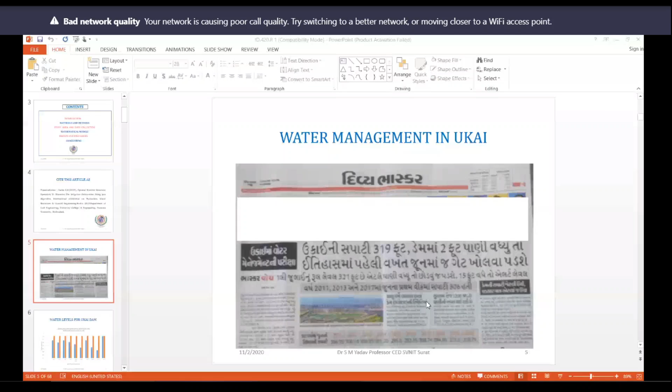Vipin sir, have you muted all of them? Can they unmute themselves? Praniti Mishra, are you there? Praniti. Yes, sir, they can unmute themselves.

Yes, sir. So tell me, my question here is that the water stored in the dam is less, okay, while there is consistent irrigation demand, okay. So because of this, such a year comes in case when there is less storage of water in the dam, right? Can the irrigation demand be satisfied or not?

Sir, repeat again, sir, question. Sorry, I'm not getting it properly. I will repeat, Pranti, I repeated twice. Again I repeat, if there is less water in the dam, right, and irrigation demand is consistent, that is not going to change, okay sir. So if there is less water in a dam and the demand is there, what will happen? Can you be able to satisfy irrigation demand 100%?

I think no, sir. Right. So that's why the title of this particular topic is optimizing irrigation deficiencies, right? So first of all, you understand what I am trying to explain to you.

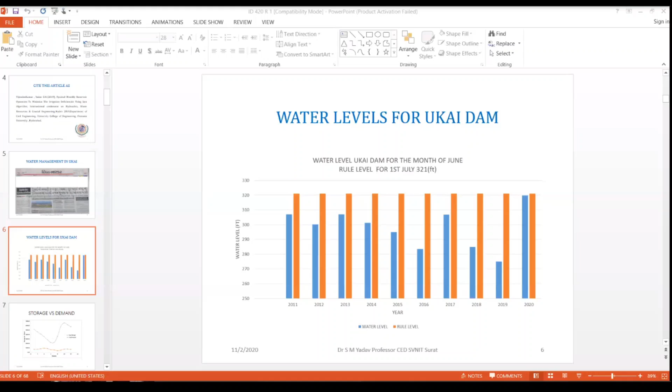If the available water is less, what will happen? There won't be water to supply for the irrigation purpose, right? So why do we need to optimize? Why do we need to do optimization? This is the reason because of which we wanted to do optimization.

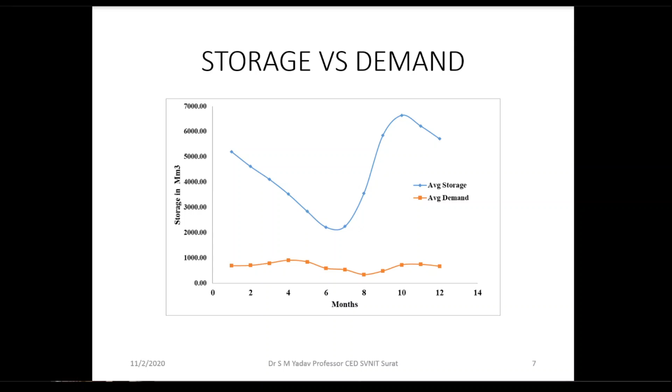But here I wrote average demand. I have not written average irrigation requirement, right? That demand includes everything. So if my demand increases, or demand is more than that of the average storage, what will happen? There will be deficiency in the irrigation water requirement, right? So in this study, in this research, we tried to minimize the irrigation deficiency for Ukai Reservoir.

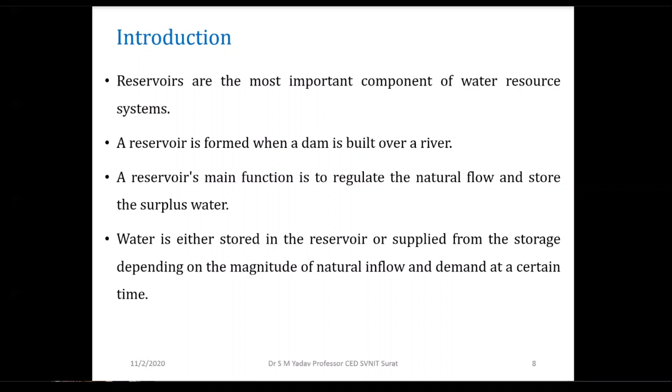So you know what are reservoirs? Reservoirs are the most important component of water resources system. A reservoir is formed when a dam is built across a river. The main function of reservoir is to regulate natural flow and store surplus water. Water is either stored in the reservoir or supplied from storage depending on the magnitude of natural inflow and demand at a certain time, right?

A reservoir offers a water head that can be used to generate hydropower also. Once reservoir systems such as dams, hydroelectric plants and networks of irrigation canals are created, the advantages that can be achieved are largely dependent on how these reservoirs are managed. The effective use of water resources needs not only prudent design but also good post-construction management.

When we say post-construction management, how is this significant or important? I think those who are from South Gujarat or from Surat very well know the significance of post-construction management of a dam. If anyone is from South Gujarat or Surat, please unmute yourself and tell me what happened. I'm talking from a water resources or hydrology point of view, in 2006 in Surat.

What happened in 2006 because of Ukai Reservoir? Anyone from Surat or South Gujarat? The exact date is 8/8/2006, 8 August 2006. Any participant from South Gujarat or Surat, please reply. No one? Okay, if no one is there, fine.

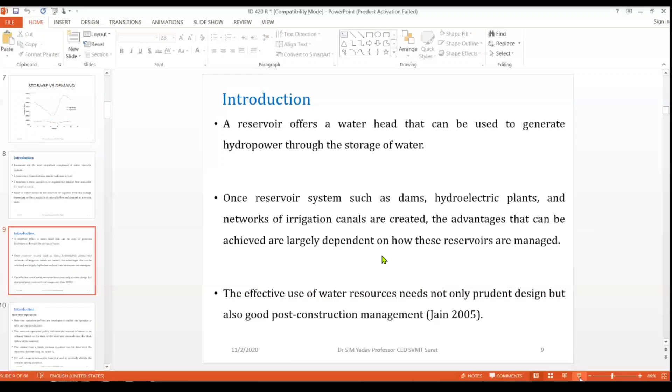Post-construction management is very much required, as in 2006 there was high inflow in Ukai Reservoir and more than 10 lakh cusecs of water was released by the dam authority, and 90% of Surat was underwater. So this is the example of what I mean by post-construction management.

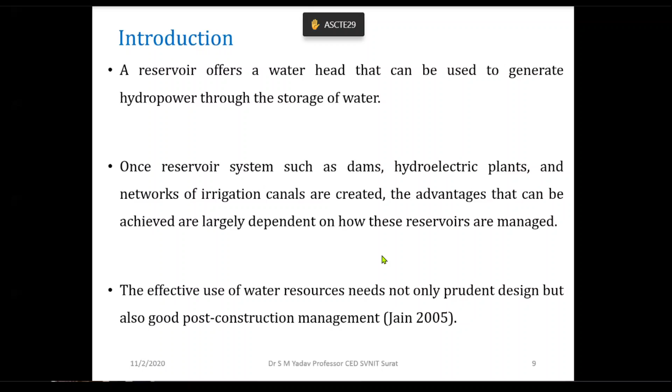When we talk of reservoir operation, the reservoir operation policies are developed to enable the operator to take appropriate decisions. The reservoir operation policy indicates the amount of water to be released based on the state of the reservoir, demands, and the likely inflow into the reservoir. Why is there a rule level?

The rule level is to manage the inflow in succeeding months. Suppose in the month of July I fill the dam full, and there is rainfall in August, September and October. Where will that inflow water go if I have not decided the rule level?

345 is the FRL of Ukai Reservoir, and in July we fill it up to only 321. So the dam remains empty between 345 and 321 for the months of August, September and October. That is nothing but the reservoir operation policy.

Why is it made? It's made depending upon the state of the reservoir, likely demands, and likely inflow into the reservoir. In July we keep it at 321, not filling up to 345. The reason is that if you fill it up to 345, the reservoir will be full.

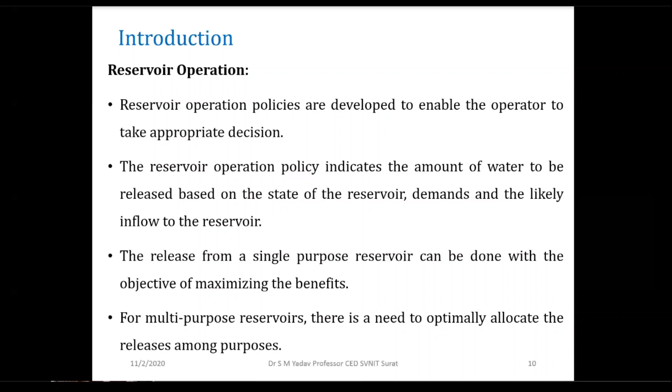Our purpose is to minimize irrigation deficiencies depending upon the varying storage over the last 10-year period for Ukai Reservoir. So this is the multipurpose dam.

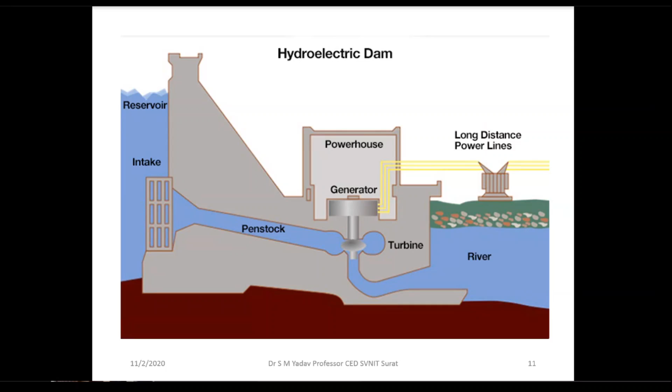How is it operated? How is the power generated? It is shown here. This is very popular. The operation of a reservoir constitutes a very significant aspect of water resources planning and management. The operator must provide comprehensive instructions once a reservoir is created, enabling suitable management choices to be taken.

In the reservoir's operating strategy, the quantity of water should be calculated according to the condition of the reservoir, level of requirements, and data on potential reservoir inflows. So reservoir operation is a very, very tricky operation.

Operating a reservoir is very tricky, and due to climate change, it is becoming more crucial worldwide. Why? Because short duration, intense rainfall in the catchment area of the river results in rushing flows into the reservoir.

And if your reservoir does not have cushion to store this excess water, what will happen? You have to open the gates, and the moment you release water more than the carrying capacity of the river, it will result in flooding of downstream areas. This is happening all over the world wherever there is a reservoir upstream.

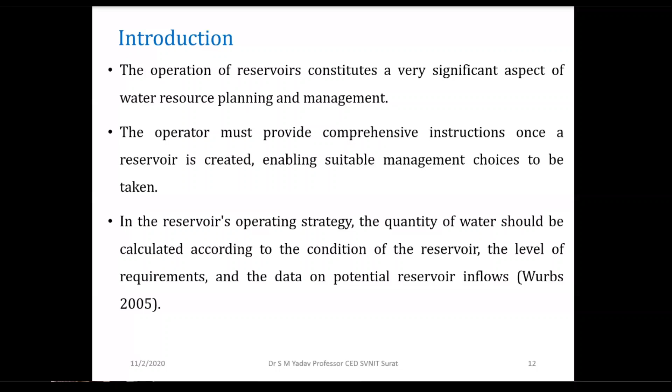Due to short duration, high intensity rainfall, flooding is occurring in downstream areas of the reservoir. So there are a variety of disputes occurring between demands for various reasons when operating a reservoir for more than one purpose, such as space, time and discharge conflicts. In accordance with a set of rules or guidelines for water storage and release, a reservoir is run according to its purpose, and decisions on releases are made in compliance with the demands in various periods.

So we cannot operate reservoirs arbitrarily. Sometimes, if you get a chance to talk to any dam authority or engineer managing water in a reservoir, ask him about situations that create unbearable pressure on them.

For example, in 2006, on 7th, 8th and 9th August, high dramas were going on in the collector's office, where the collectors and the dam authority — the executive engineer or superintending engineers responsible for operation of the dam — wanted to release water because there were high inflows. But the collector may be refusing, saying don't release this much water because we have no time to shift people from low-lying areas to higher areas.

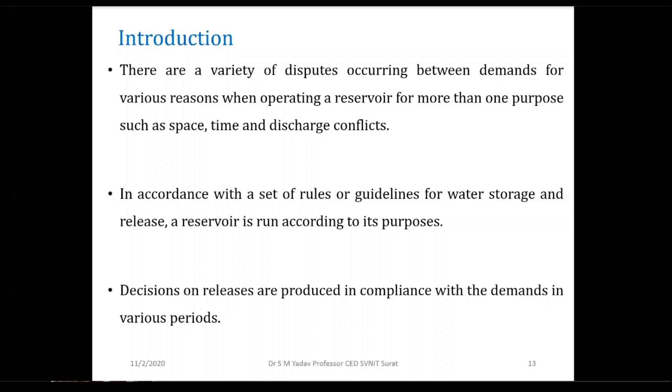We know that India has 3 seasons, and mostly we have to depend on the storage of dams during our monsoon season. Our authority which forecasts the water is the Indian Meteorological Department, and since the last 10 years their performance has improved tremendously.

I'll not go through the optimization topic in detail, I'll just take the definition and various methods of optimization. I will not discuss further as I have been given 45 minutes to 1 hour, so I'll directly come to the problem which we have solved using the Jaya algorithm.

However, just have a look at the definition of optimization. Optimization is defined as the process of finding the condition that gives the maximum or minimum value of a function, where the function represents the effort required or the desired benefits.

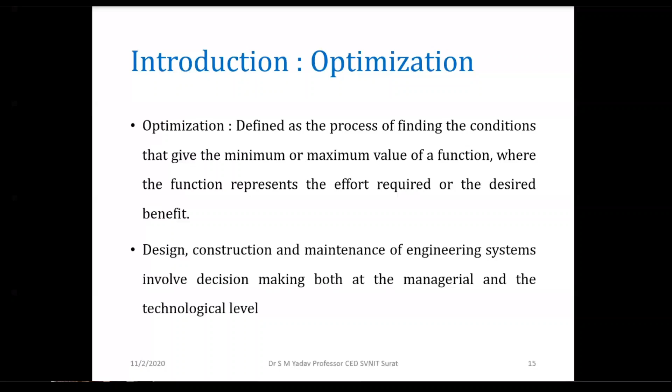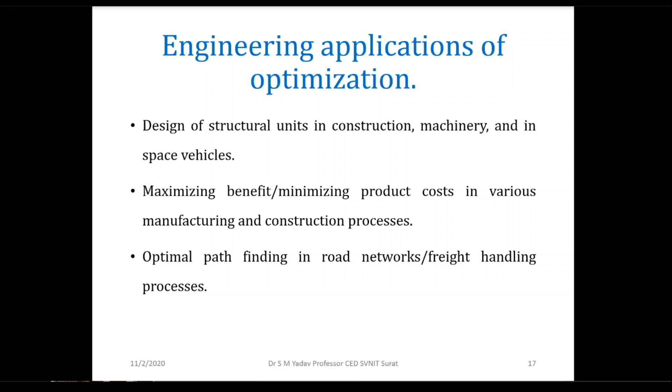So, engineering applications of optimization - I know you are from various areas of expertise in civil engineering. Any specialization you name, there is an application of optimization techniques. So this part I am not explaining in detail.

Briefly I will explain the model building process. In case of model building for optimization purposes, the development of an optimization model can be divided into 5 major phases: Number 1, collection of data. Number 2, problem definition and formulation. Number 3, model development. Number 4, model validation and evaluation of performance. And number 5, model application and interpretation of results.

So whenever you want to develop any model, you have to start with collection of data. Based on the data you have collected, you define the problem, and based on that you develop your model. Then the model developed using this data is required to be calibrated and validated. Once it is calibrated and validated, it is ready for application.

Usually, as most of you are from faculty or teaching, some idea clicks in your mind that you want to do a certain kind of work, and you assign it to your student, or you yourself start doing research work on a specific topic. Then what happens is, the moment you start searching for the data, you find that some data required for your study is unavailable. By that time you have already spent 2 or 3 semesters, or your student's semester is already half over, with half remaining in which he has to complete his work.

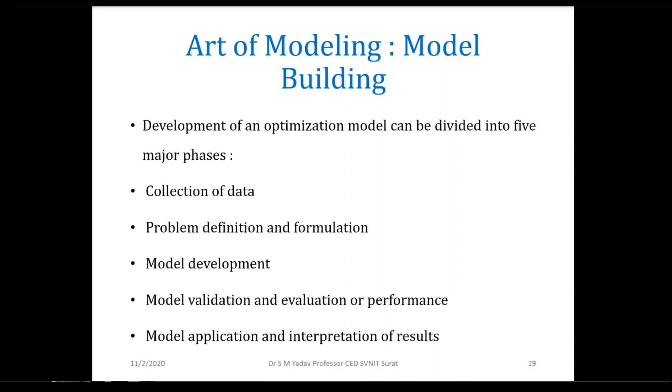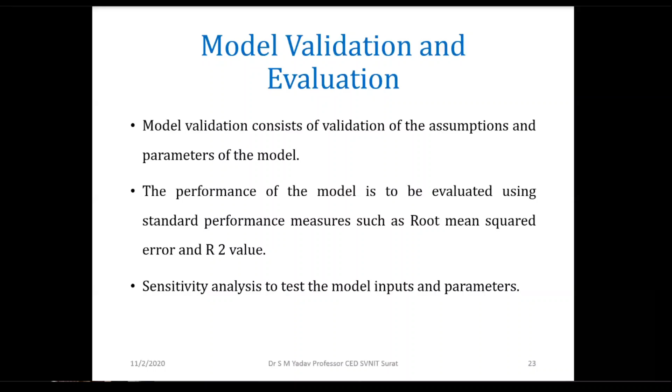However, for optimization model development, these are the 5 steps: collection of data, problem definition, model development, model validation and calibration, and model application and interpretation of results. So this is all about the steps I have described: data collection, problem definition, model development, model validation and evaluation, and then modeling techniques - various modeling techniques you are going to study during this STTP.

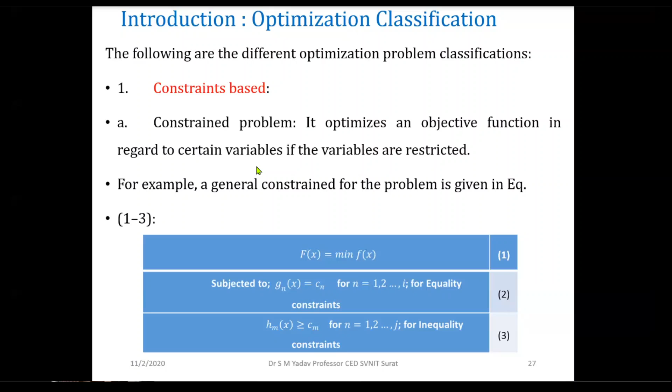There are n number of modeling techniques. Some of them I have listed here; I will not read them out. Then there's the classification of optimization, how classification can be done based on constraint, based on physical structure, based on nature of the equation, based on deterministic nature of the variables, and depending upon the number of objective functions, whether it's a single objective function or multiple objective functions, and the significance of optimization.

This will also help us understand real world problems you want to solve, where the objective function is dependent upon one or more parameters, and how much importance is to be given to which parameter, or in which way it is to be done. So that significance of optimization is covered in this.

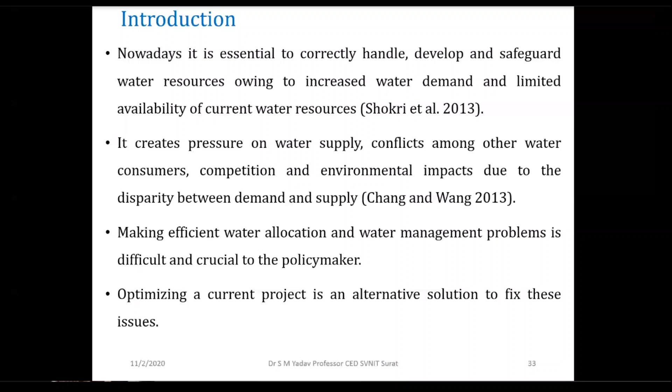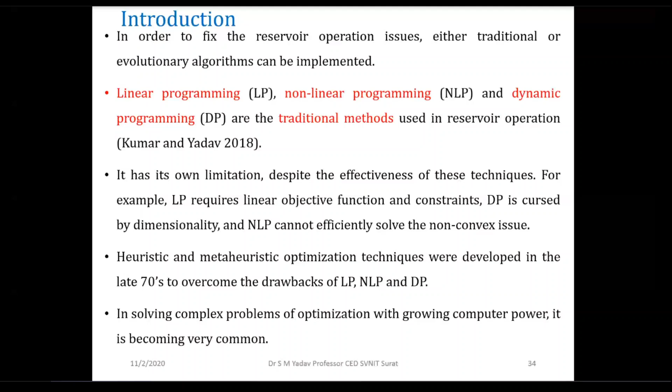Again, these are all the various methods used by one or another for solving a problem: linear programming, non-linear dynamic programming, and traditional methods. They are used for reservoir operations, and genetic algorithms are also used for the operation of reservoirs.

For example, chapter 1 covers environmental engineering, municipal solid waste management, where the analytical hierarchy process is used. The second is construction project performance, where analytical hierarchy process is used. The third is again environmental engineering, pipe condition assessment, using a fuzzy rule based system. Then for water resources, spillway gate operations use a fuzzy logic based operation system. The fifth is groundwater quality modeling.

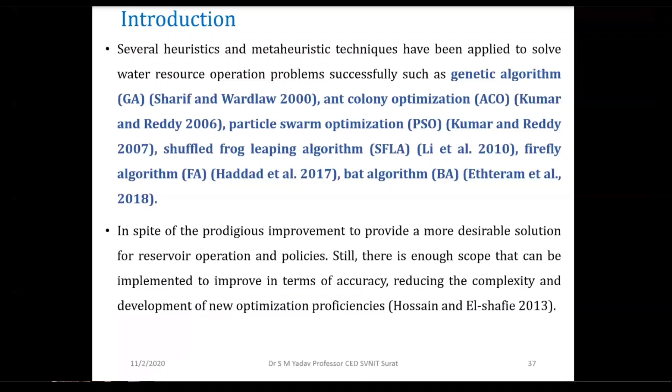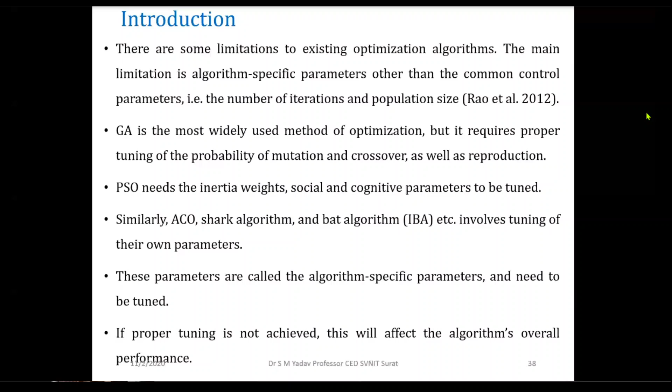Coming to our Jaya algorithm, we know that each and every soft computing technique is based on one or another fundamental requirement, and each technique has some sort of need. For example, if you take GA or PSO, you need to tune algorithm specific parameters, and until these algorithm specific parameters are tuned, you will not be able to properly use the genetic algorithm, PSO, or any optimization algorithm.

So what is the advantage of the Jaya algorithm? To overcome the requirement that algorithm specific parameters need to be tuned, the Jaya algorithm was newly developed, free of these algorithm specific parameters. In view of Jaya's success in addressing various field and water resources issues, this paper applies it to the problem of reservoir operation in order to minimize irrigation deficits. The output of the Jaya algorithm is compared with two other optimization techniques: the invasive weed optimization algorithm and PSO algorithm.

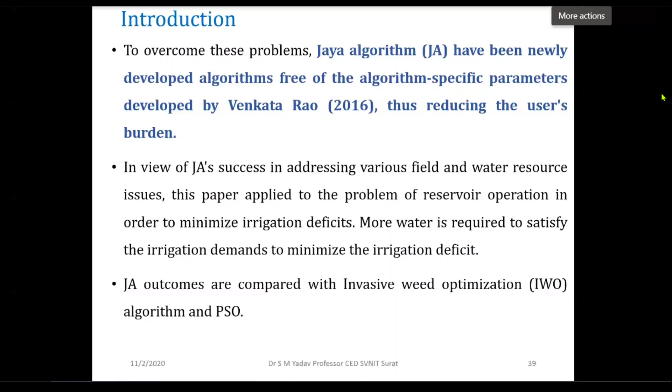So how is the Jaya algorithm? This algorithm was developed by Venkata Rao in 2016, who was the speaker for the inaugural session of today's program. The algorithm is based on the concept that the solution obtained for a given problem should move toward the best solution and must avoid the worst.

These are the limitations of some developed algorithms: they are not refined enough, and instead of giving the best solution, they sometimes get trapped into the worst solution, defeating the entire purpose of optimization. By using the Jaya algorithm, you can overcome this specific drawback and get the best solution. The algorithm always tries to get closer to success and tries to avoid failure.

This is the Jaya algorithm flow chart, in which you have to initialize selection of population, number of design variables, and number of termination criteria that you have to first decide. Then random generation of population, identify the best and worst solution, modify the best and worst solution as given by this mathematical formula. If the new solution is better than the old solution, then you accept and replace the previous one, and if the termination criteria is met, then terminate the program, otherwise repeat the procedure. So this is the Jaya algorithm, based on which the solution can be taken up.

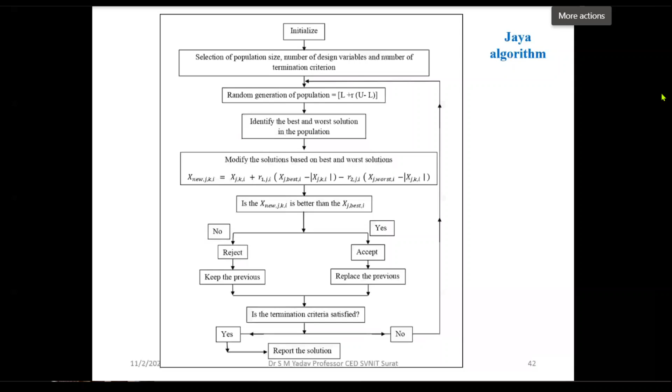Once the Jaya algorithm is applied, as I said, the model is required to be calibrated and validated. So between the observed values and the simulated or optimized values, how will you find out whether your model is performing good or whether your model is performing poor?

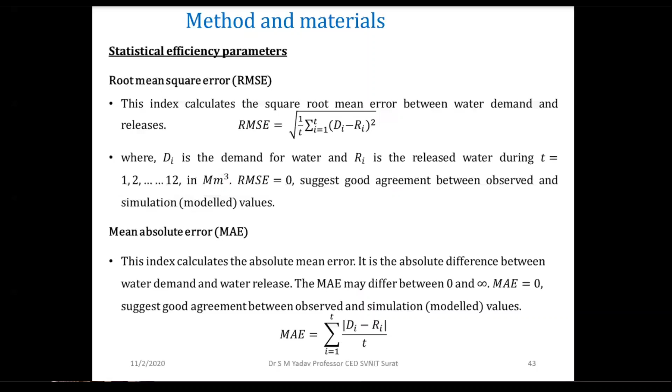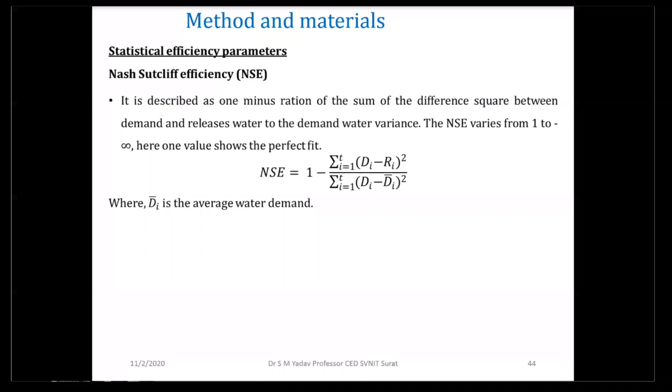For that, statistical parameters are used in this analysis: root mean square error, mean absolute error, and Nash-Sutcliffe coefficient efficiency, and their definitions are given on how to compute it. Then performance evaluation indicators, reliability and vulnerability index, are used to find out the performance of the model. So statistical measures find out whether the model is performing better or not, while these performance indicators show how reliable the results are. Again, root mean square error, mean absolute error, and Nash coefficient efficiency are statistical measures, while reliability index and vulnerability index are the performance evaluation indices.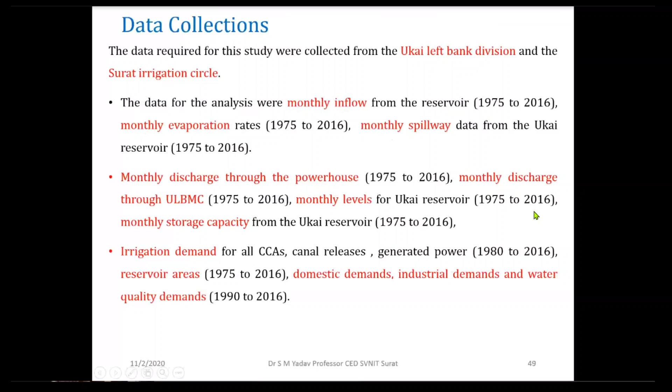What does D1 represent? D1, D2 and D3 are the irrigation demands for the Ukai Left Bank Main Canal, Kakrapar Left Bank Main Canal, and Kakrapar and Ukai Right Bank Main Canal combined. If you see this figure, the area KLBMC, ULBMC, and these two, URBMC and KRBMC, have been taken combined. The irrigation water requirement for this has been taken as combined demand, giving us D1, D2, D3 for the period T equal to 1 to 12.

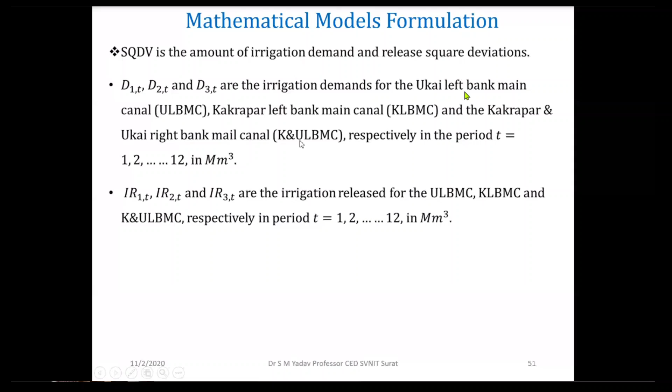IR1, IR2 and IR3 are the actual irrigation releases. Demand is one side, and depending upon the availability of water in the dam, water is released into the canals, so those releases are given as IR1, IR2 and IR3. 1 represents Ukai Left Bank Main Canal, 2 represents Kakrapar Left Bank Main Canal, and 3 represents combined Kakrapar and Ukai Right Bank Main Canal for both demand and releases. We have taken this because we want to minimize the irrigation deficiency, so to minimize irrigation deficiency we have chosen this particular objective function.

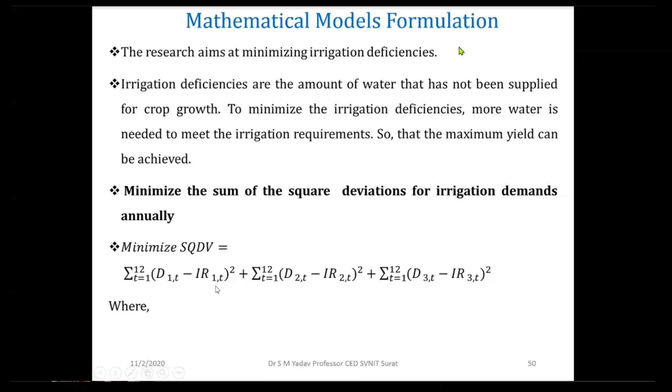Now, what are the constraints for demand? What are the constraints for irrigation releases? We have listed those, and the constraints are similar.

The first one is the continuity constraint, where the storage at the end of the day is equal to storage at the beginning of the day plus inflow minus outflow. This continuity equation explains that ST plus 1, the storage at the end of the period, equals storage at the beginning plus IT, the inflow, minus releases for riverbed turbine, IR1, IR2, IR3 the irrigation releases, ET the evaporation, and OVF the overflow. All this comes out to be ST plus 1. So that is the first constraint, the continuity constraint.

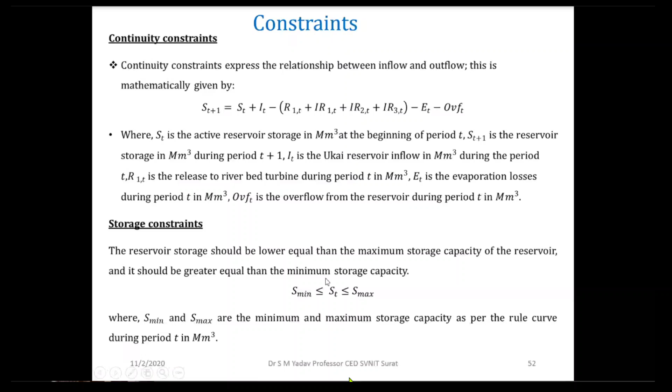The second constraint is the storage constraint: what should be the value of ST? ST, the storage in the reservoir, needs to be more than the minimum storage and less than the maximum storage. For that, we got data from 1975 to 2016, and for that period we found the minimum and maximum storage, which we have given as a constraint.

Then the evaporation constraint: we used the equation for calculation of evaporation, and calculated that evaporation for all the years, subtracted it, and given it as an input into the continuity equation.

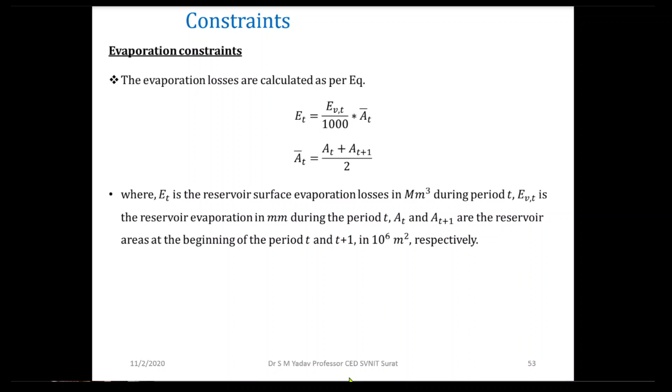Then canal carrying capacity: you cannot release water more than the carrying capacity of the canal. Therefore, irrigation release IR1 should be less than or equal to the carrying capacity of canal 1, irrigation release IR2 should be less than or equal to the carrying capacity of canal 2, and irrigation release IR3 should be less than or equal to the carrying capacity of canal 3.

Then the overflow constraint: OVF equals storage at the beginning plus inflow minus all the releases, minus Smax, the maximum storage. For example, as I explained earlier in this lecture, the rule level of July was 321. So for overflow, if the water in the month of July is more than 321, the overflow will start, because the maximum will be the 321 rule level.

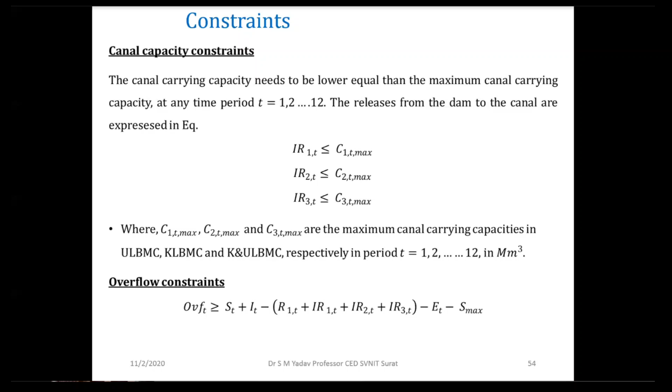So if the water in the reservoir, that is ST plus IT, is more than the maximum storage allowable in the dam, that will result in opening of the gate and the water is allowed to flow out as overflow. Then there are irrigation demand constraints, which have a minimum and maximum.

The irrigation demand should be between the minimum requirement and maximum requirement. This data we found out by collecting the actual amount of water supplied for a period of 1975 to 2016, and we found out what is the minimum requirement and what is the maximum requirement for the 3 command areas of Ukai, and that has been given as the irrigation demand constraint.

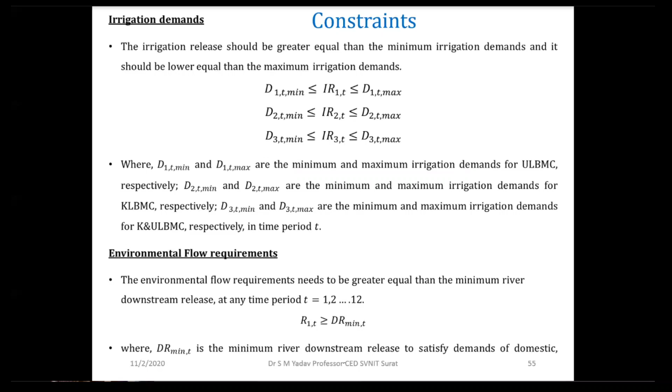Then environmental flow requirements - you know that there should be minimum flow in the river which is to be maintained to maintain flora, fauna and aquatic life in the river. So for that purpose, environmental flow requirements, that constraint was also given.

So after giving all these constraints and coding it in MATLAB, for the Jaya algorithm along with PSO and IWO, these two other algorithms, that has been run.

The common control parameters such as number of iterations 25, 50, 75 and 100, and population size of 1 lakh were used to check the efficiency of algorithms over 10 separate runs. So 10 runs were done for this sample size for 1 lakh population.

I am presenting this specific work. I have been given 1 hour time to present this work, but when we have carried out this work, it took more than 1 year to run successfully this model.

So sometimes it feels that the expert comes and tries to explain you a certain algorithm or case study, and you feel that the expert has done some miracle and got the results overnight. No, that is not possible.

To run the algorithm itself is again a Herculean task, and you should understand what kind of error it gives. Sometimes the algorithm runs, but you should know whether it has given the correct results or there is some error into it. So you need to know all these things when you are running - though the computers are there, though the MATLABs are there, though you can write the code, though you put the data and get the results, you need to check the results also, whether they are up to the mark or not.

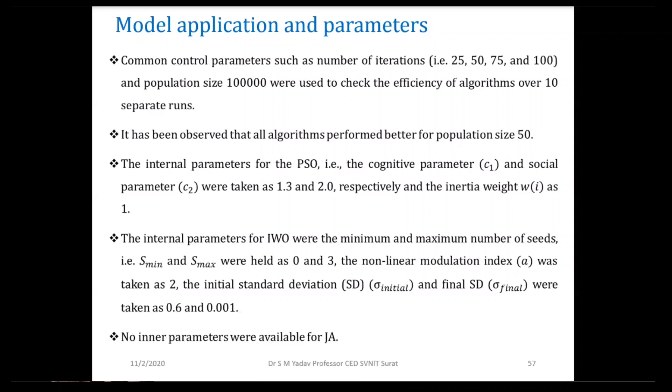So in this particular study, 3 algorithms were run. Number 1, Jaya algorithm, and to compare the results of Jaya algorithm with other algorithms, IWO (invasive weed optimization) and PSO, these 2 algorithms are run separately using the same data and the constraints which I have shown earlier. For that, the 3 algorithms were run - PSO, IWO, and Jaya algorithm.

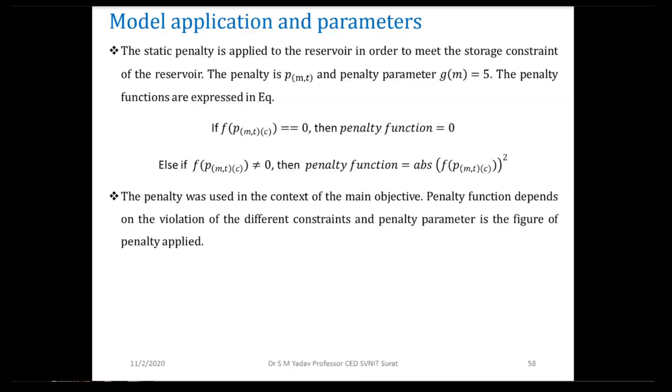In case of Jaya algorithm, when the results are not up to the mark or the accuracy is not as we need, then there is a provision of penalty, and that penalty parameter you have to apply. That penalty parameter and equation has been shown over here in this specific slide.

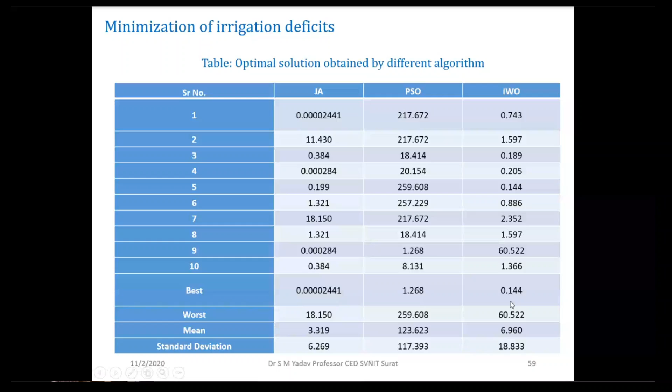So this is the right hand side objective value, a mean square deviation of irrigation deficiency. In Jaya algorithm it is 0.00002441, while in case of PSO it is 1.268, and in case of IWO it is 0.144. So you can say that the Jaya algorithm has given better results than PSO and IWO algorithms.

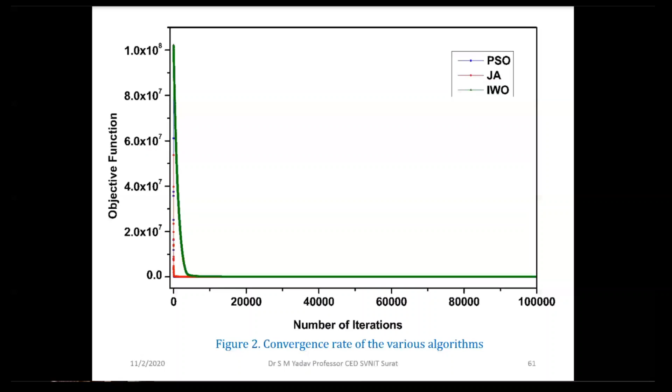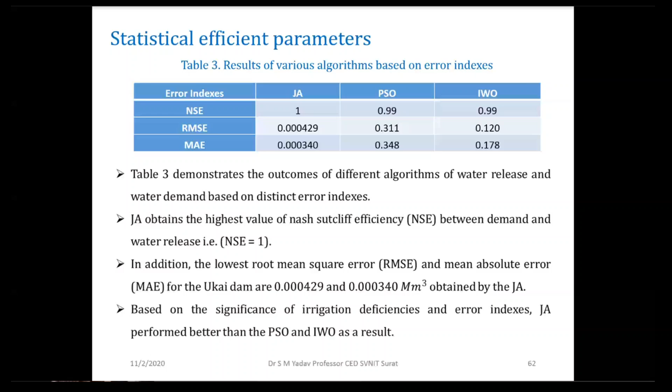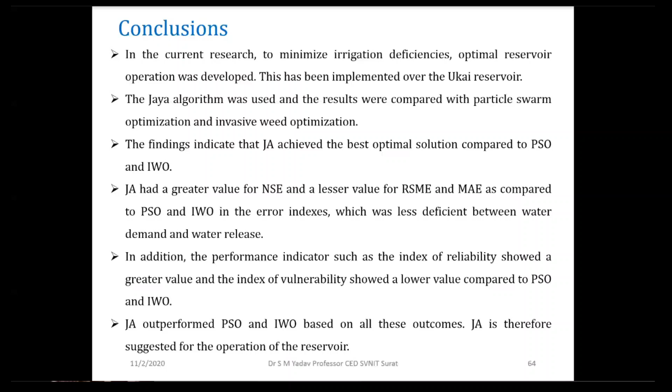This has been implemented over the Ukai reservoir. The Jaya algorithm was found to be performing better compared to invasive weed optimization. Rest I have already explained that this gives better results.